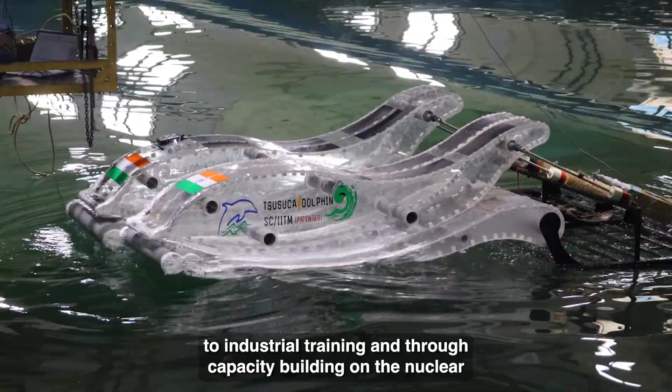This maritime engineering program is very special, with multidisciplinary input from mechanical, civil, structural, aerospace, naval architecture, chemical engineering, electrical, electronics, and applied mechanics. It's dedicated to industrial training and thorough capacity building in the new trade of the maritime sector. It's a growing economy offering job opportunities and research frontiers as India grows. The Blue Corridor initiative planned by the Government of India is an important mission requiring maritime engineering growth, and this program caters to that expected capacity building.

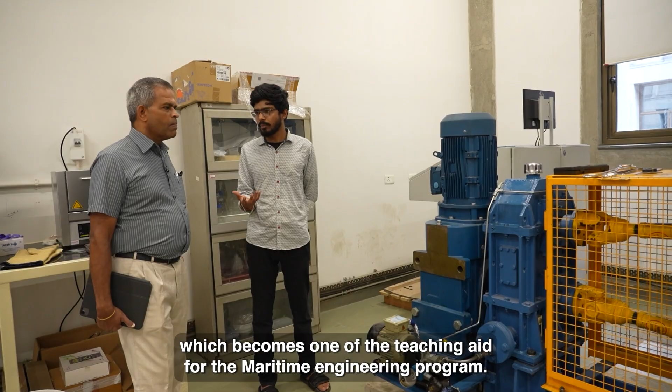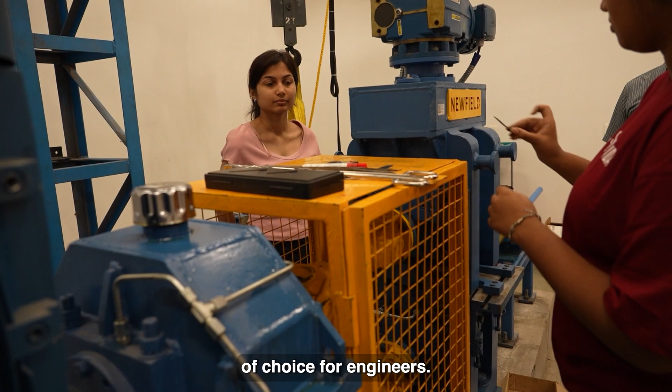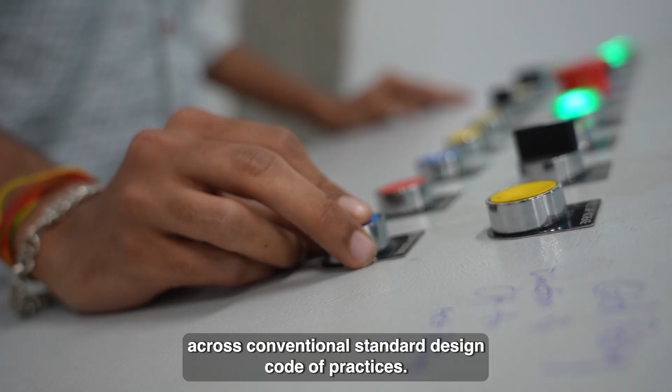This is part of the material science engineering laboratory, a teaching aid for the maritime engineering program. When we talk about materials innovation in the maritime industry, concrete and steel have been conventional choices, but now we have titanium vessels and high-speed craft boats made of fiberglass. These advanced materials do not always fit conventional standard design codes of practice.

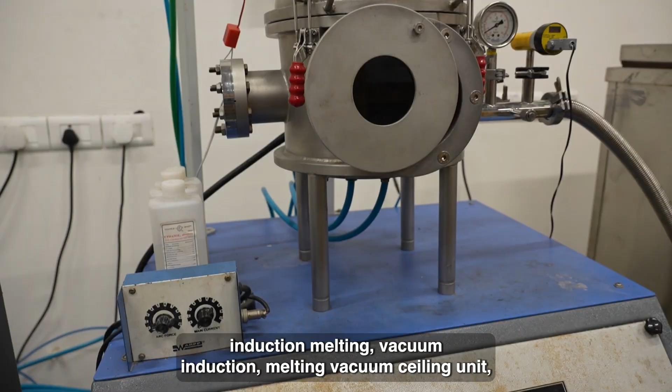We conduct box furnace tests, tube furnace tests, vacuum arc melting, induction melting, vacuum induction melting, and vacuum sealing, all present in this laboratory, which is just a small segment of the material science laboratory.

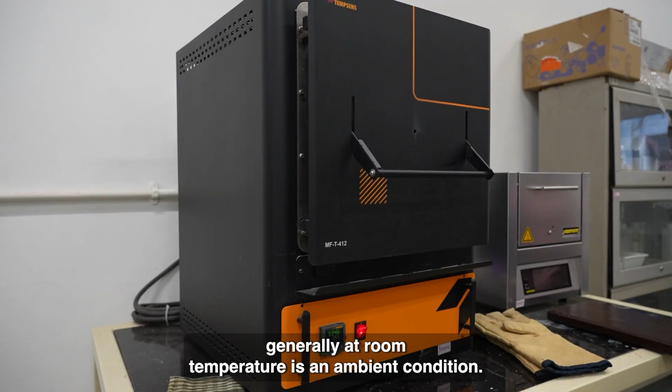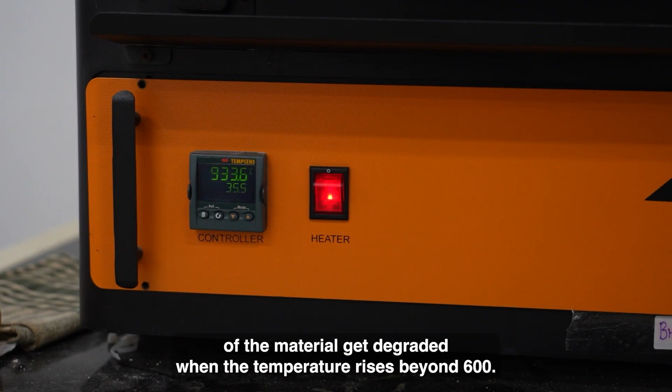In a typical furnace, the operating temperature for testing a specimen can go very high. Generally at room temperature and ambient conditions, mechanical properties do not alter much, but as you'll see in the course lectures, the strength of a material degrades when temperature rises beyond 600 degrees. Therefore, for fire resistant design, you must choose an alloying element such that the strength doesn't degrade beyond 600 degrees Celsius.

Welcome to the ambience of the IIT Madras lecture theatre, one of the interesting classrooms where maritime engineering classes will be conducted. We have state-of-the-art projection facilities and good audio-visual recording systems.

Once the lecture is over, the system generates PDF files of the lecture directly, which can be emailed to your email ID. It's a state-of-the-art facility at IIT Madras where lectures are recorded for life and shared with students immediately. This is the IIT Madras library.

The library has collections of standard textbooks and references for the course and program. It also has online editions of design codes of practice, reference materials, and e-collections of video lectures from international courses and programs related to maritime engineering.

We will be taking you around the advanced material manufacturing units, so you will see the state-of-the-art facilities available at IIT Madras. Welcome to the program to join MTech and PhD at IIT Madras Maritime Engineering. Please try to enjoy and take advantage of this to the maximum. Welcome to the program and welcome to IIT Madras.

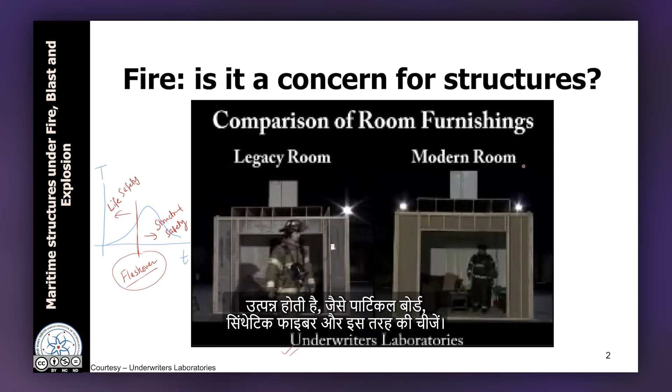With this, let us watch the video. Both rooms have similar energy content in terms of total energy. Ignition is started, and both have similar settings.

As was the case in the previous videos, fire has been initiated at one corner of the room in a waste basket. Initially, the spread of fire will be only through proximity—items which are close to the flame will catch fire first.

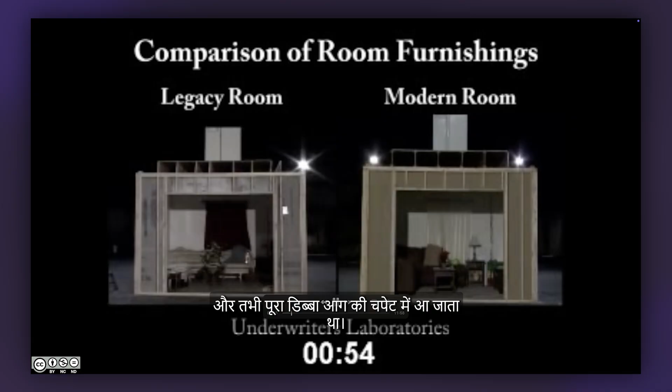Then a hot layer of gas will be formed at the ceiling. This ceiling begins to radiate everywhere, and that is when the entire compartment would catch fire. That event is known as the flashover.

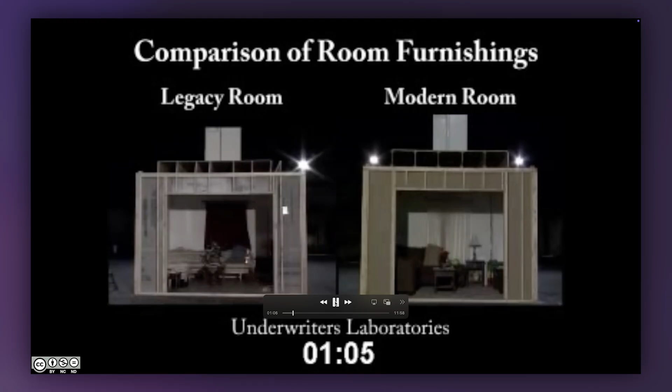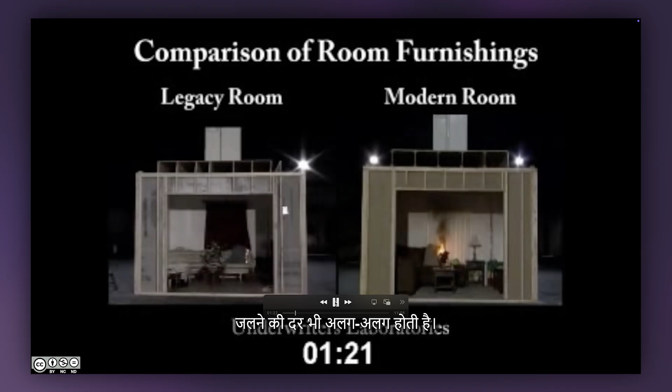What we will notice here is that the room on the right hand side, the modern room, has already begun to give very black smoke. Whereas the room on the left, the legacy room, has a more clean burning, so to say. The rate of burning is also different. The size of the fire in the modern room is increasing quite rapidly now, whereas on the legacy side it is still relatively quite small.

Hot layer of gas and smoke is already very visible in the modern room within just 1.5 minutes, which means that hot layer has already formed and has already begun radiating to the rest of the room. Whereas on the legacy side, the layer of hot gas is still very small—in fact, it is not even visible as leaving the compartment.

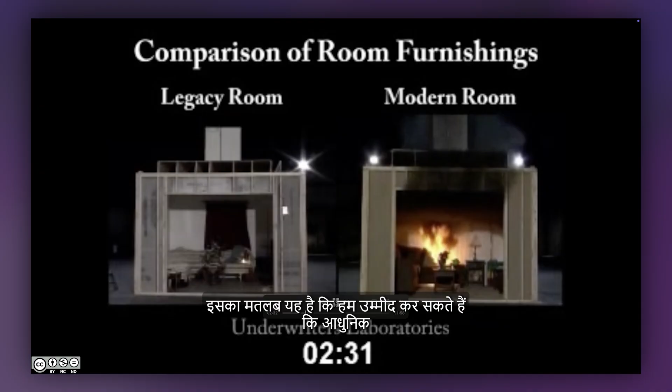In the modern room, you will see that the smoke layer is descending, which means the neutral plane is coming down, implying that the reservoir of hot gas has increased in size and temperature, indicating a much higher radiation heat flux being emitted and received by the surfaces around. This means we would expect flashover to happen quite fast in the modern room—in fact, much earlier than in the legacy room, based on what we are seeing as of now.

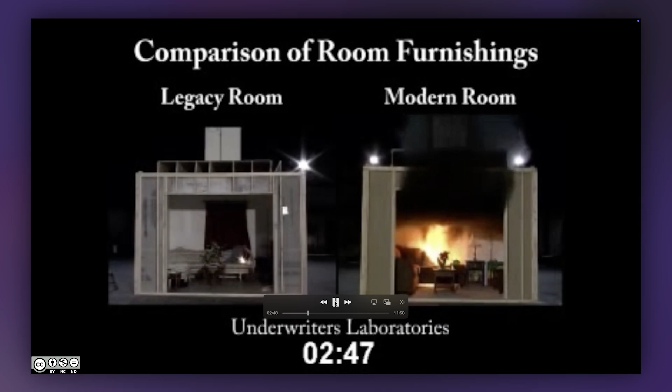It is reaching almost 3 minutes. The size of the fire in the modern room has become quite large, but it has still not flashed over yet. Whereas in the legacy room, the size of the fire is still very small.

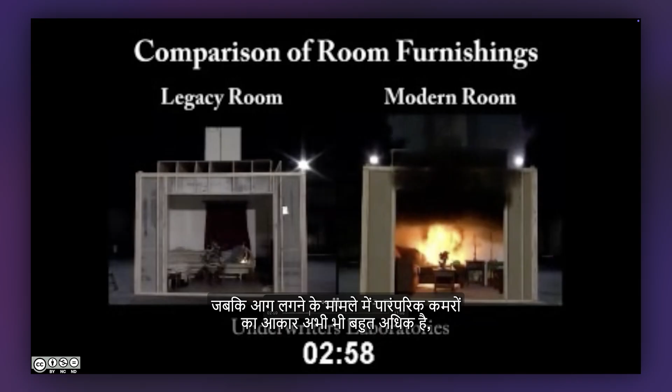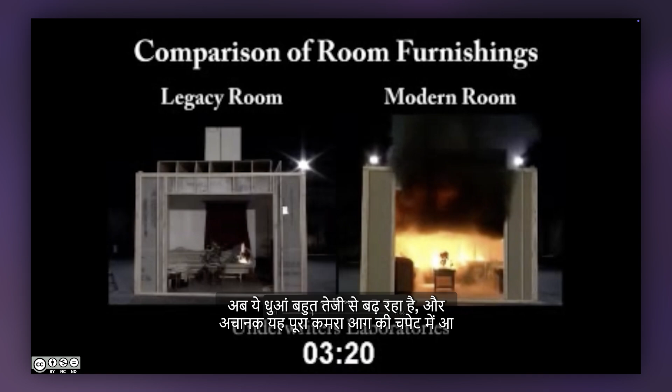Now you may notice that items which are away from the fire have begun to emit some fumes in response to the heat radiation being received from the top layer. Now these fumes are increasing very rapidly, and suddenly this entire room will catch fire.

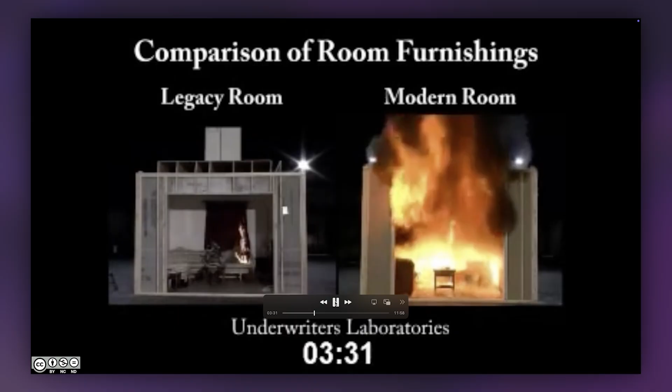Now this entire room is on fire, which means flashover has happened in the modern room in about 3.5 to 4 minutes—in fact, a bit less than that, around 3.5 minutes.

The size of the fire on the legacy side is still increasing. It is still not large enough to have a large layer of smoke, which will eventually cause flashover, whereas the room on the right hand side is completely gone.

This is the situation for which we have to design structural members—after flashover, this is the intensity that the structural members are exposed to. That is where the standard fire curve considers time-temperature in the post-flashover scenario. And this kind of scene is what develops.

The time to flashover in the modern room is about 3 minutes 40 seconds, whereas the time to flashover for the legacy room is about 29 minutes 25 seconds. So if we take it as 3 minutes for the modern room and 30 minutes for the legacy room, we see that flashover in the modern dwellings we stay in is happening in as much as one-tenth of the time it used to happen earlier.

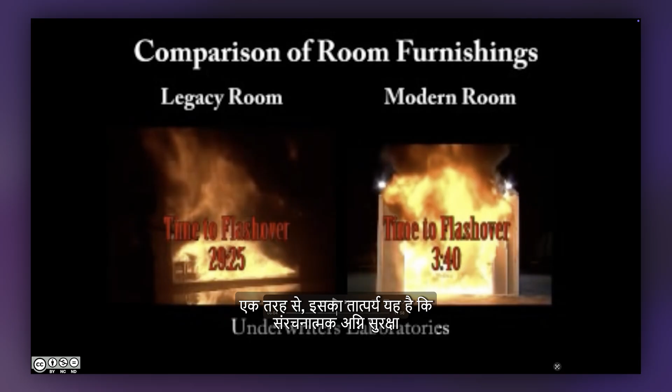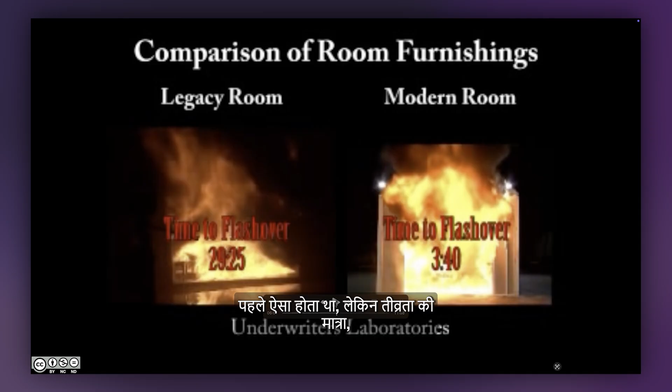In a way, this implies that structural fire safety has become much more important now than it was earlier. Not that it was not important earlier, but the amount of intensity and the amount of time we have is changing quite a bit.

If we compare these timelines, it is shown in this graph here. The shortest time to flashover is what we saw visually—in the modern system, the shortest time to flashover is around 3 to 3.5 minutes. The legacy timeline is around 30 minutes, much more. And the pre-flashover period is the time when all the life safety operations have to happen.

From a structural point of view, what we are interested in is this blue and yellow. So once we have designed systems, we would want to know in how much time a structure will collapse given a fire. What we see is that due to the intensity and severity of the fire, structural systems can collapse much earlier in a modern fire compared to a legacy fire. Knowing this helps us design structural members so we can achieve the necessary fire protection.

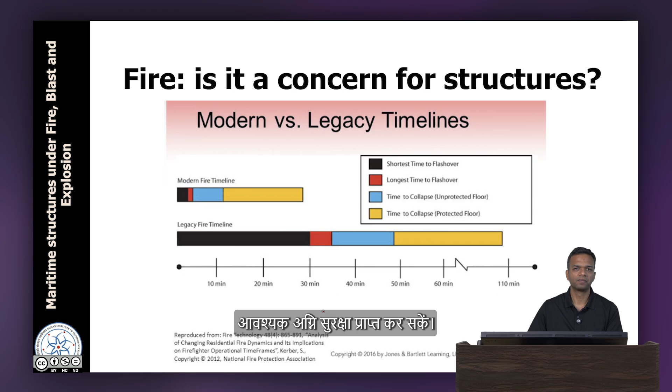Let us move on to discuss effects of fire on structures. Before we get into detailed temperature calculations, let us look at the main effects of fire on structures. First and foremost is thermal expansion.

Here we consider a case of uniform heating, say there is an unrestrained cantilever beam. We increase the temperature of this entire beam uniformly by delta T, the increase in temperature. Due to this, the length increases by L alpha delta T, where L is the original length. This is the change in length, delta L equal to L alpha delta T, where alpha is the coefficient of thermal expansion, or CTE. This is known for most materials of practical significance.

Now in this case, since thermal expansion has been allowed, there will be no additional stress due to the change in temperature. However, if we take the same beam and restrain it on both sides, and again subject it to a uniform increase in temperature of delta T, this L alpha delta T expansion, which would have happened if there was no restraint, is now not allowed. Hence, in this case, it will lead to thermally induced stress.

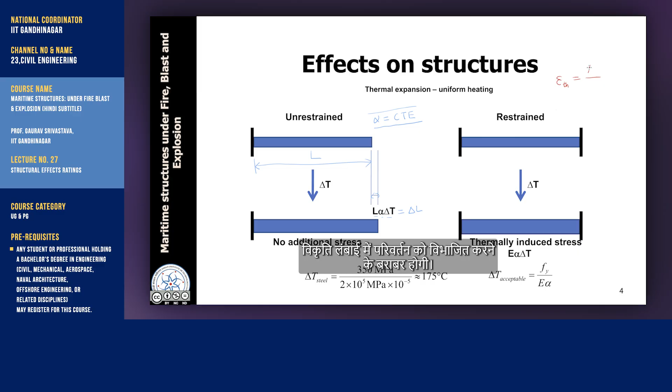We know that the thermally induced strain will simply be the change in length divided by L. The change in length is L alpha delta T divided by L, so this is alpha delta T, the thermal strain. The stress for a linear elastic material will be Young's modulus E multiplied by strain. Hence the thermally induced stress in the restrained case becomes E times alpha delta T. That is the additional stress we get purely due to thermal effects.

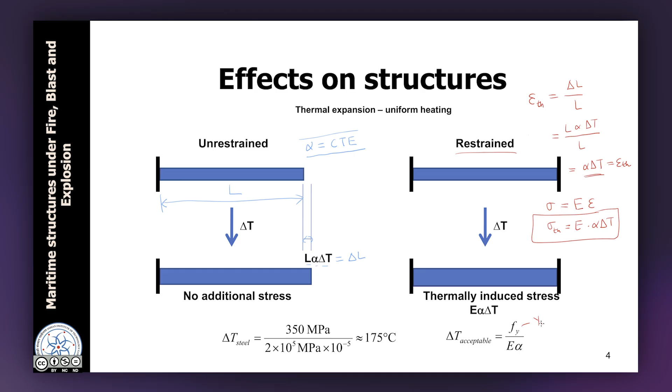Now suppose there were no other considerations and the allowable compressive stress in this beam is 350 megapascals. From there we can calculate how much change in temperature is allowable before this beam will fail. So delta T acceptable will be Fy, the yield stress of the material, in this case steel, divided by E times alpha. That gives us the acceptable change in temperature before this system will fail, and this is all happening because we have a restrained system.

Now this restraint will give rise to one more effect, thermally induced buckling. From basic mechanics, recall that for a column subjected to an axial load P with length L, the critical buckling load PCR can be derived using the Euler buckling theory, which comes out to be pi squared EI divided by LE squared, where LE is the effective length depending on the end conditions. Now what we know is that this E is a function of temperature.

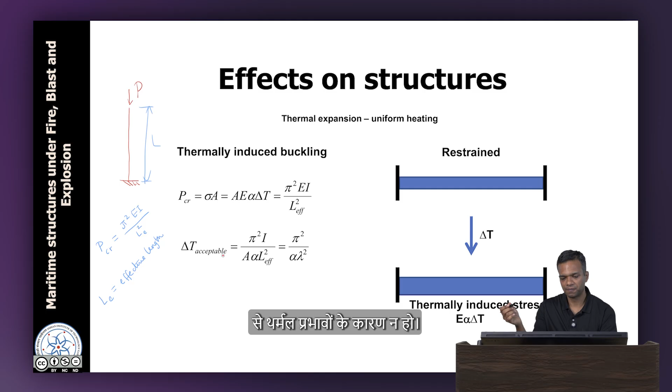So again, E is a function of temperature, and we will see how. But then the critical buckling load is now sigma times A, where A is the area of cross section, and sigma we know is E alpha delta T. From here we can again calculate T acceptable such that buckling does not happen purely from thermal effects. In the previous slide we saw that yielding should not happen because of thermal effects; in this slide we are saying how buckling can be onset based on thermal effects, where lambda is the slenderness ratio.

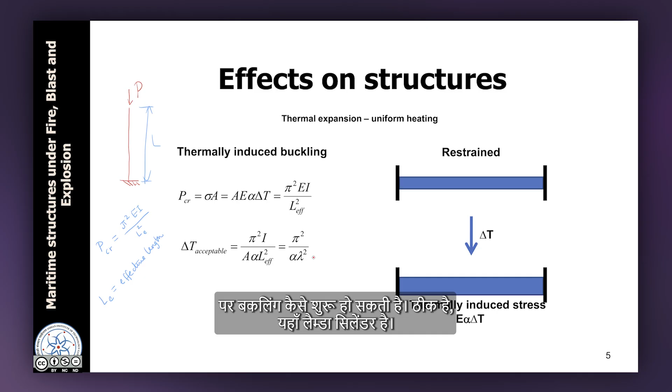The previous two cases were of uniform heating, meaning the temperature of the entire cross section and length would be the same. That situation is possible for metals like steel, which are good conductors of heat. However, for materials like concrete, which are poor conductors of heat, if we expose them on one side, the temperature at the bottom face and the top face can be very different. In fact, for a reinforced concrete cross section, if the bottom boundary is heated with temperature T1, the overall temperature distribution can be highly nonlinear, where this is T1 and this may still be T ambient.

However, for an idealized case, if we consider a linear thermal gradient, which means along the cross section, the thermal gradient looks like this, where this is say T1, this is T2, and this is linear.

In such a case, when temperature at one end is more and the other face is less, then because one of the fibers will expand more and the other fiber will expand less, it will lead to thermally induced curvature. An expression under linear theory can be obtained for thermally induced curvature like so.

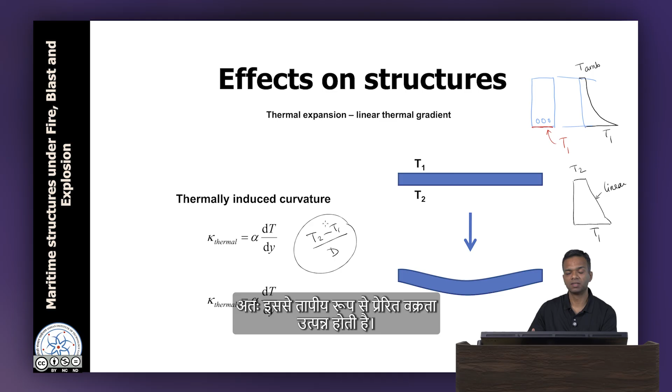So the effects we have seen so far are the thermal response of the deformation. However, due to temperature, the material properties of the system will also change.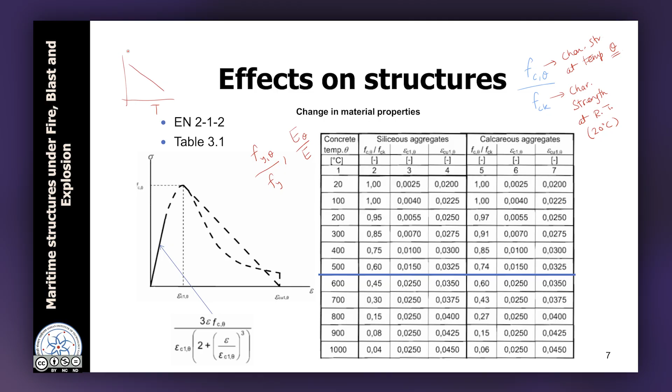So if we put all of this together, what is happening is that without fire, there is a certain demand in load - so this is the demand - and there is a certain threshold, which is the capacity. So there is capacity, and there is demand, and the distance between these two is the margin of safety.

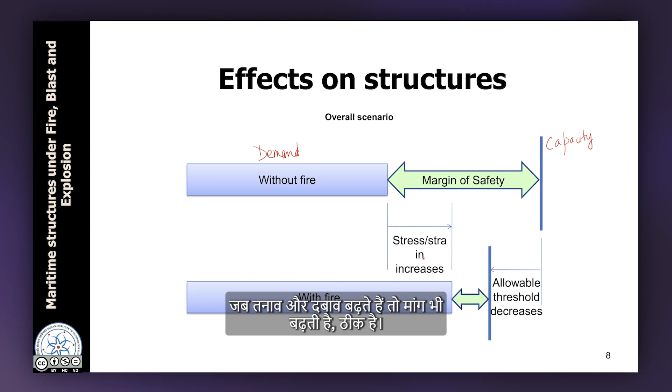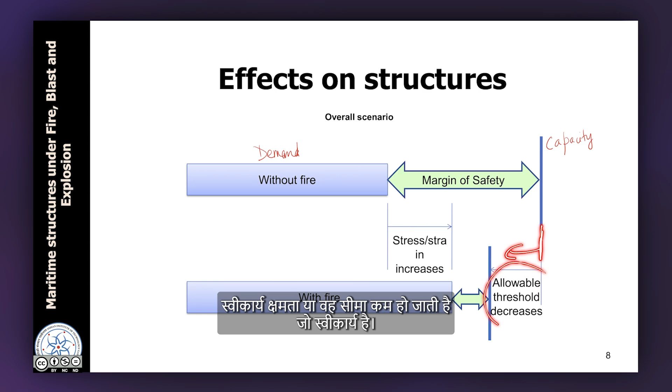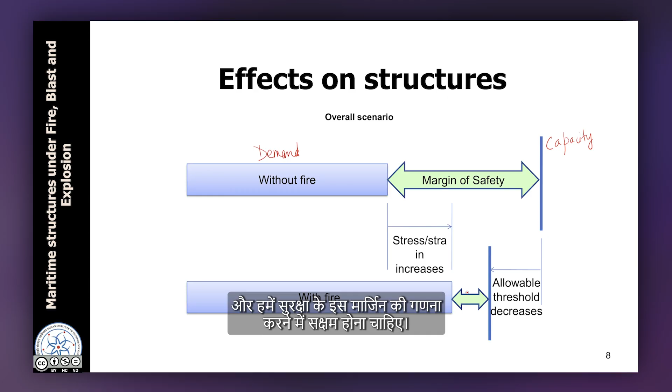Due to fire, the stresses are increasing. When the stresses and strains increase, demand increases. However, because the material properties degrade, this allowable capacity, or threshold, reduces. So this in a way reduces the overall margin of safety, and this margin of safety is what we need to be able to calculate so that we are able to design structures under fire.

These are some photographs which show the effects of fire on structures. The top two photographs are of steel structures. What is very visible is that there are very large deformations, extremely large deformations. This is because the strength has reduced and thermally induced buckling may have happened, thermally induced additional bending may have happened. There is instability, which means this is a case of buckling - buckling which was not happening at room temperature has happened at high temperature.

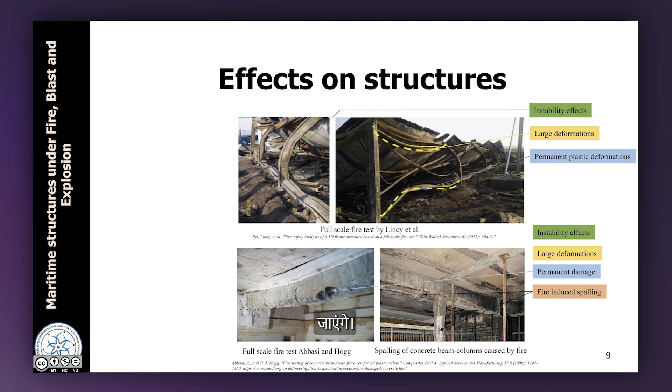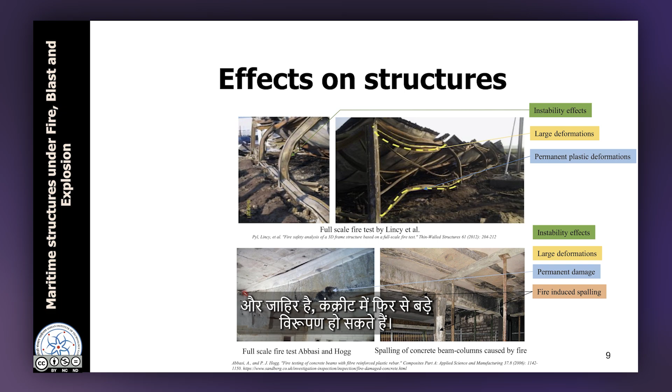And when deformations become very large, these steel type materials undergo permanent deformations, or sometimes called permanent plastic deformations. For concrete, there are again instability effects that can happen, and there is an additional phenomenon called fire induced spalling. Spalling implies that chunks of concrete would chip off out of a beam or column. This corresponds to permanent damage, which means damage that cannot be undone, and obviously large deformations can again happen in concrete.

So if we have a structural system, what we are looking at is we have a fire. From this fire, there is a heat transfer to the structural system. Then within the structural system, there is a heat transfer. This is what we need to be able to calculate. So temperature of fire to temperature of structure is what we need.

For steel structures, this is sufficient. For concrete structures, there are additional complications or additional physics that one has to resolve. As we know, concrete is a multi-phase system: you have aggregates, cement matrix, moisture which is in liquid form, and air. This is at room temperature.

At a higher temperature, some of this moisture converts to water vapor. And we know that when liquid water gets converted to water vapor, its volume increases rapidly. This causes a lot of increase in pressure internally. This is the increase in pore water pressure of a concrete structure at a higher temperature.

And that can cause additional spalling. We will see an example where it can cause explosive spalling, which means the column can actually explode under a fire, even though there was no other explosive provided to it.

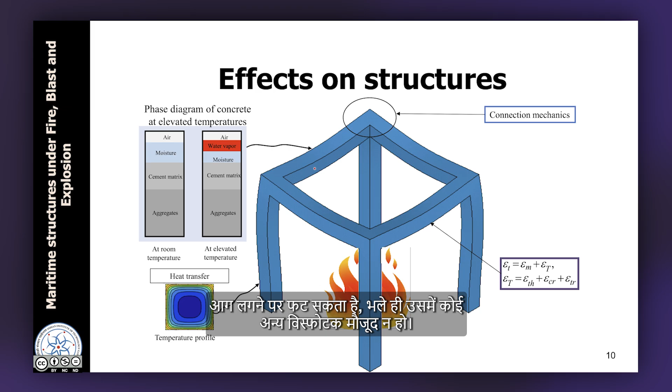Then there may be boundaries of a structure which are not exposed to fire. They are exposed to a different temperature, say room temperature. That is where convection and radiation cooling may happen. Inside the structural member, which is generally a solid, the heat transfer happens through conduction.

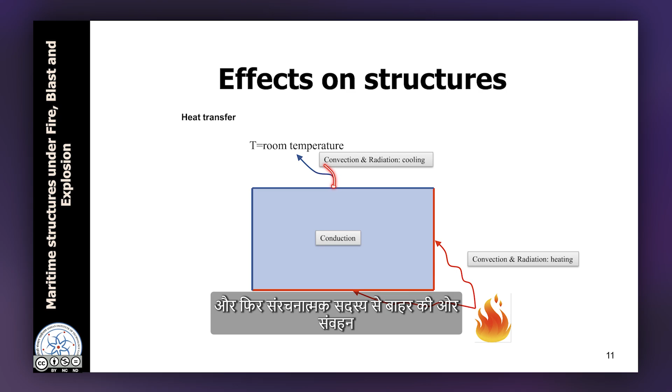So there are three modes of heat transfer at play here: convection and radiation from fire to the structural member. Inside the structural member, we have conduction, and then from the structural member to outside, that is convective cooling or radiative cooling.

As we said, for concrete structures, there is an additional water vapor transport that one has to look at. Mathematically it can be modeled as a diffusion equation. So there is diffusive mass transfer, but when chunks of concrete begin to spall, the boundary conditions become updated. Basically, initially this is the heated perimeter of concrete.

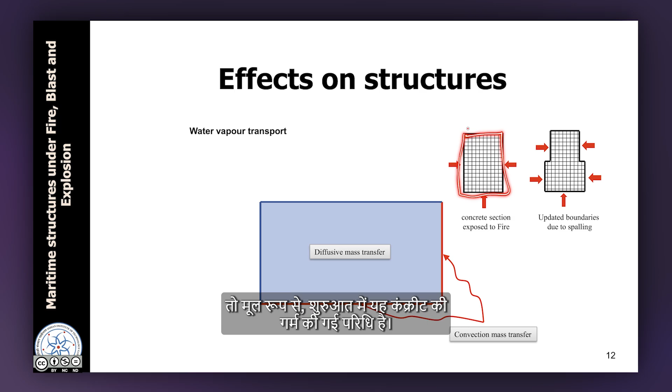After this part has spalled off, the heated perimeter increases. So this further intensifies the temperature seen by concrete members.

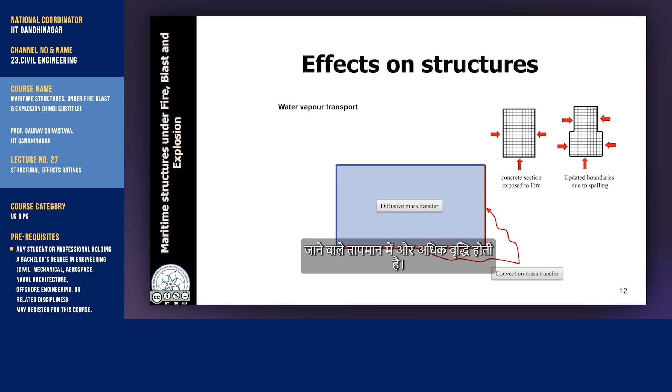This is an example of an experiment of a slab where, based on the heating, we can see that there is a dry zone and there is a saturated zone. When water vaporizes, it will try to expand. When it tries to expand and leave, that is where it introduces tensile stresses in concrete, and we know that concrete is not very good in tension, so it begins to crack from there. And if we are able to break it inside, we will still see liquid water available. So this is the water front which is available.

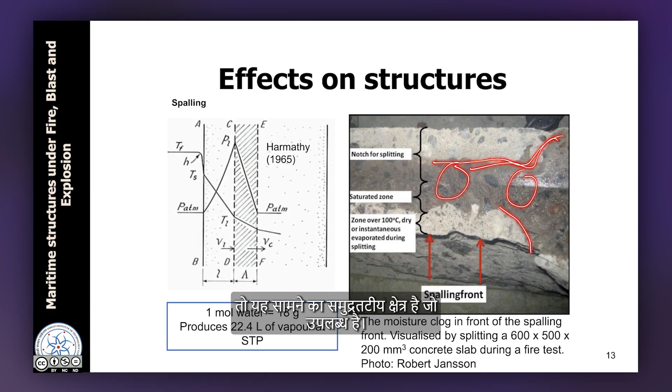This photograph shows two types of columns. On the left hand side is normal strength concrete, which is lower strength, say up to 40 or 45 megapascals characteristic strength. On the right hand side is high strength concrete, which is very high strength, meaning strength greater than 50, say 50 megapascals.

What is interesting to observe here is that normal strength concrete has a higher permeability, which means there will be a higher chance of an interconnected pore network being available. So the water vapor which is trying to expand and go out is able to escape. When it is able to escape, the extent of spalling is not that severe.

When we come to high strength concrete columns, their porosity is very low, permeability is very low. So the water vapor is not able to escape. Hence, it builds a lot of tensile stresses inside the concrete, and when enough of such pressure has been formed, the concrete column can actually explode. This has been observed experimentally, as well as in several real life fires.

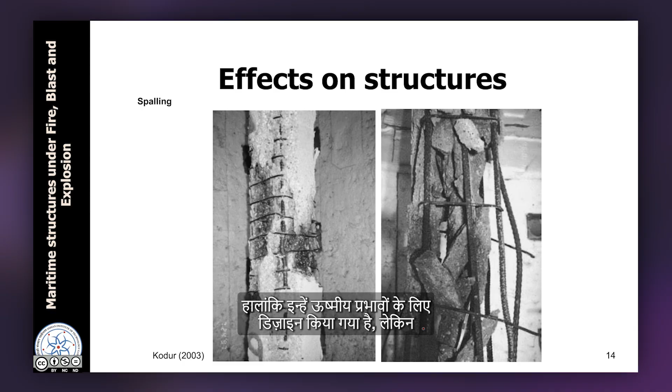Now, an exploding column can be very dangerous for life safety as well as for building safety. For building safety, it is obvious, because this column completely ceases to take load. But from a life safety point of view, many times firefighters are inside the building when the fire has become a full size fire. In such a case, if a concrete column would explode, that can put our firefighters at risk, because the proximity suits, although designed for thermal exposure, are not designed for projectile impact.

From here, let's discuss what are the design requirements and limit states. So primarily there are three limit states that one will discuss.

One is the load carrying capacity. It is the total time in which the column, beam, or slab would fail, basically when the load resistance becomes less than the load effect. As long as it remains more than that, it is okay.

Then the second one is integrity. Integrity accounts for small deflections, but predominantly it is meant for cracks. If small fissures or cracks develop which allow hot gases to pass through to the other side, that is considered loss of integrity.

And the third one is loss of insulation, or the insulation requirement. This is when integrity is still retained, but purely due to thermal conduction from one side of the member to the other, the temperature increases so much that on the other side of the wall or slab, the room can become exposed to a high enough temperature that it can onset another fire.

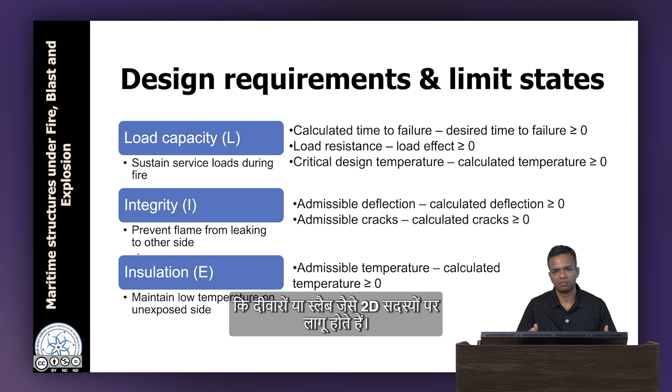So these are the three fire ratings that one talks about. The first one, load carrying capacity, is applicable to all structural members: beams, columns, slabs, shear walls. Integrity and insulation are applicable primarily to partition members, such as 2D members like walls or slabs.

If we again recall the standard fire curve for a moment, we recall that the standard fire curve represents a post-flashover temperature scenario.

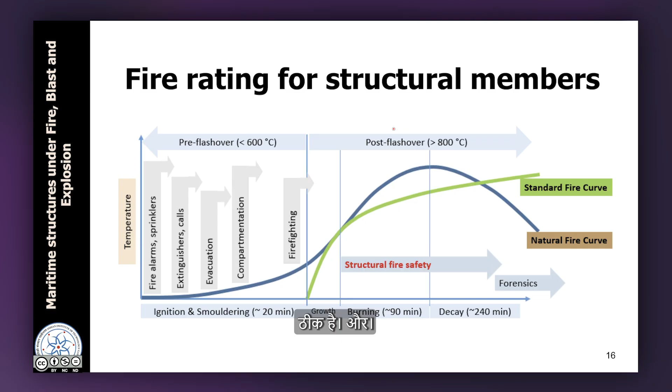Now let us define what is fire rating. We have been talking about it, that fire rating is always derived from a standard curve. Let us say if we have a fire rating of 1 hour, fire ratings are defined in terms of time.

When we say fire rating is 1 hour, what that means is we take a structural member, put it under the loading condition as it would be in a normal service condition, and expose it to the standard fire curve shown here. So if for up to 1 hour the structural member is able to sustain its L, E and I requirements—load carrying capacity, insulation, and integrity requirements—then it will be said that it has a 1 hour rating.

Similarly, we can say what is a fire rating of 2 hours—that is applicable if it can sustain all of its requirements up to 2 hours, and so on. So this is how we define fire ratings in terms of time, and these are all derived from the standard curve.

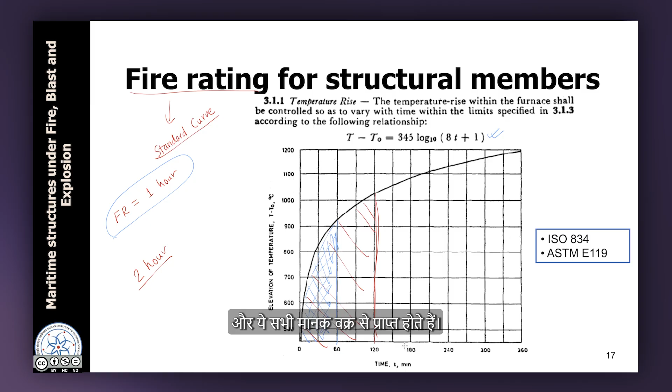One of the questions that may arise is that we are defining fire rating based on this standard curve, whereas actually the structure is subjected to this natural fire curve. Even for structural members where we are looking at the post-flashover scenario, one of the key differences is that the standard fire curve always increases, so temperature does not decay, whereas in a natural curve there will be a decay in temperature.

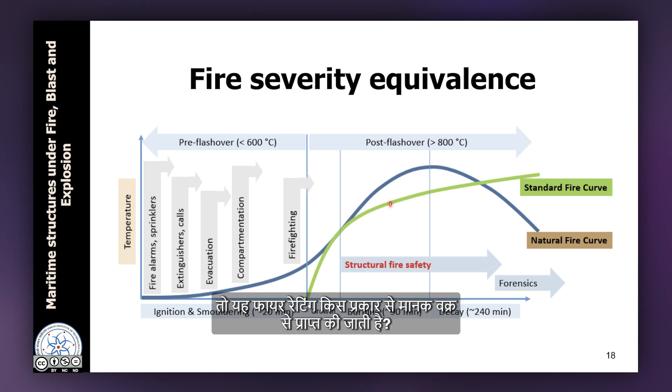So how is this fire rating, which is derived from a standard curve—that is, a time—how is it applicable in a real scenario? That is what leads us to the concept of equivalent fire severity.

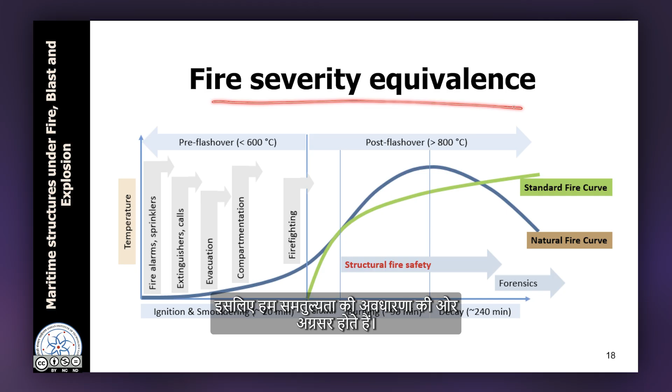We go up to a time where the area under the standard curve is equal to the area of the real curve. This is an area equivalence. It is most easy to implement. However, it does not have a physical basis behind it because area of a time-temperature curve does not have any physical significance. Area of HRR versus time curve gives us energy, but area of temperature versus time does not give us anything physically meaningful. So while this can be used, it is not ideal to be used.

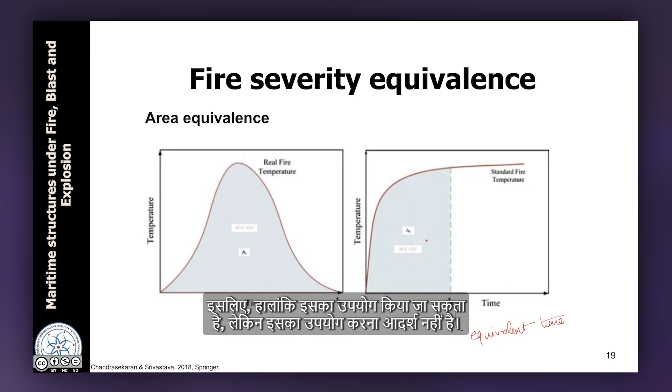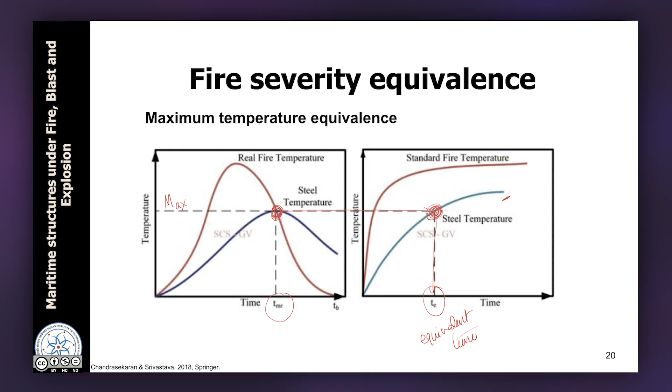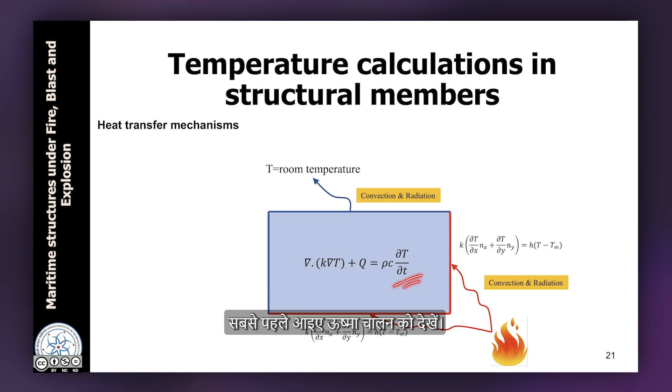This slide shows the derivation of the one dimensional transient heat equation. I will not read out the steps, but it is simply doing an energy balance. Here we have introduced two more properties: C, the specific heat of the material, and rho, the density of the material. In cases when conductivity, specific heat, and density are constant for a material, one can define the ratio alpha equal to K by C times rho, which is the thermal diffusivity.

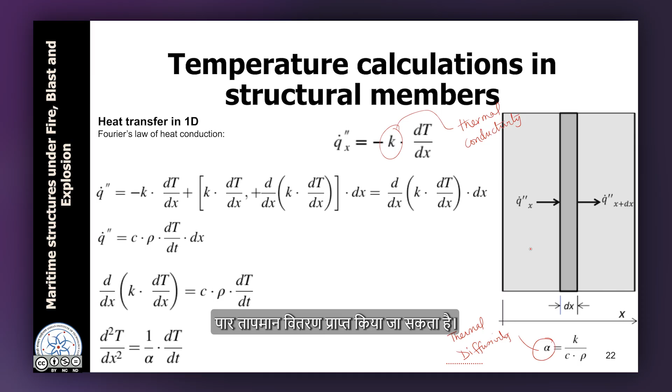This thermal diffusivity is an important material parameter when doing 1D heat transfer calculations. This is the final transient equation that one can solve to obtain temperature distribution. What is interesting is that this equation enables simple calculations also. This derivative we can approximate as K times delta T divided by delta X, since dT by dx is the derivative as delta x tends to 0. But under many situations we can simply do this, where delta x is the total length between two points. So this conductive heat flux, q double dash, can simply be written as K times delta T by L. Here we define a term Rk, called thermal resistance, which is the ratio of the length in which heat transfer is happening divided by K, the thermal conductivity.

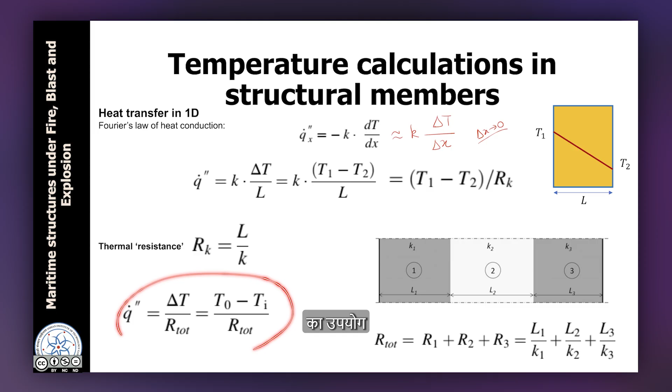This thermal resistance acts in a very similar way to electrical resistance. So if we have multiple materials, one of length L1 and conductivity K1, another of length L2 and conductivity K2, etc., we can define thermal resistance for each of them, R1, R2, R3, and this is like resistors connected in series. So the total R will simply be R1 plus R2 plus R3. From here, if we know the temperature at one end, it is easy to calculate temperature at the other end or anywhere in between using the regular electrical resistance methodology. Like this we can handle multiple connected materials, calculate total resistance, and then calculate Ti, any intermediate temperature, like this.

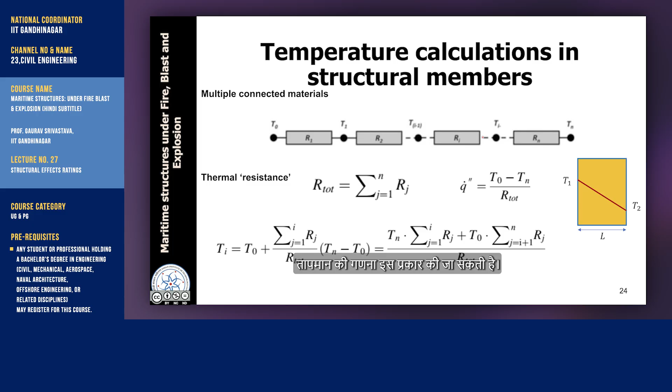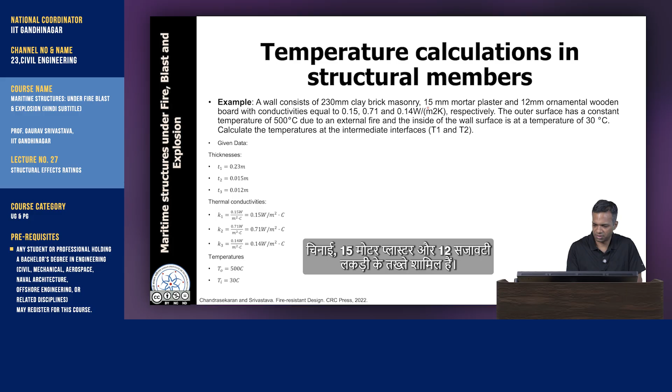To do an example: a wall consists of 230 mm clay brick masonry, 15 mm mortar plaster, and 12 mm ornamental wooden board. Their thermal conductivities are also given. The outer surface has a constant given temperature, and the inner wall temperature is given. So we have to calculate temperature at the intermediate interfaces. That is what we have to calculate.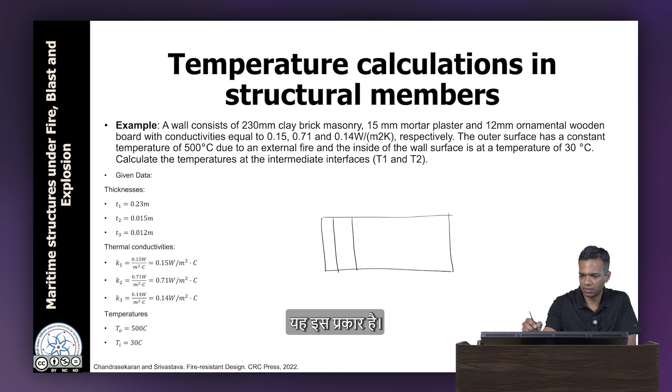So if we draw this, it is like this. So we have here masonry 230 mm, this is plaster 15 mm, and this is wood, okay, and wood is 12 mm.

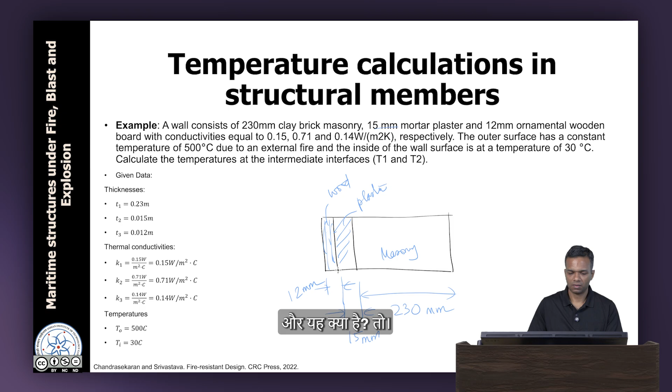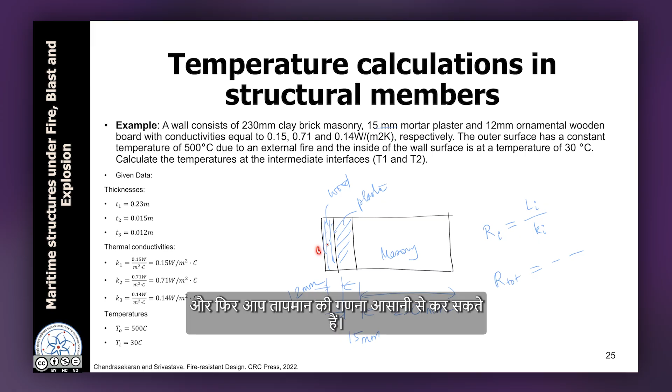So looking at this kind of analogy, we know L and K for each. So Ri, which is resistance of ith member, can be calculated, and then you can calculate the R total as the summation, and then you can do the calculation of temperatures. Okay, so please try to do that by yourself.

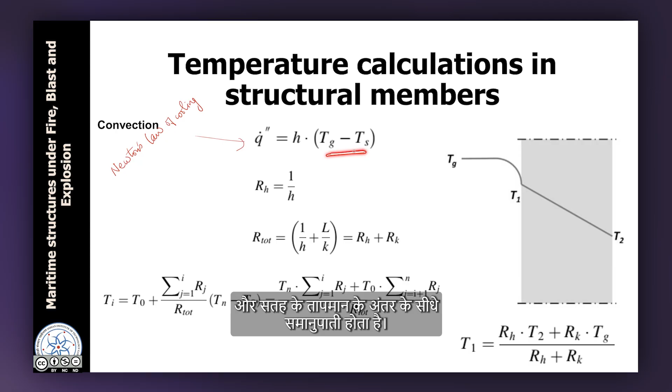Next we look at convection. Okay, so convection is generally governed by Newton's law of cooling, which states that the convective flux is directly proportional to the difference in the gas temperature and the surface temperature, and in this case the proportionality constant is H, which is also called the convective heat transfer coefficient. Okay, so this is also a property of fluid which can be calculated for different scenarios.

And if we continue the electrical resistance analogy, just like earlier we defined L by K as the resistance, the convective resistance can be defined as RH, which is 1 by H. Okay, so if we have a system where conduction is happening here and convection is happening due to the gas outside, the total resistance can be simply calculated as 1 by H plus L by K. Okay, and again we can then calculate the intermediate temperatures, say T1.

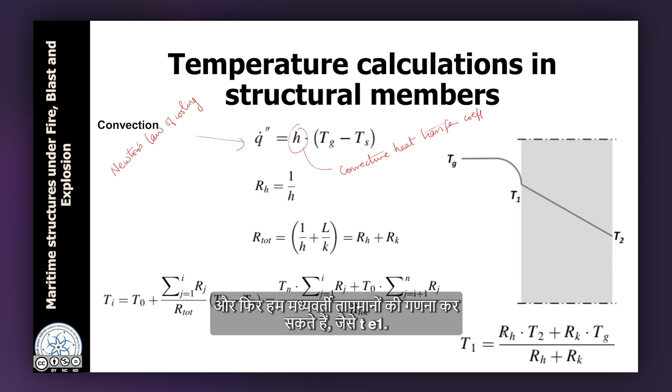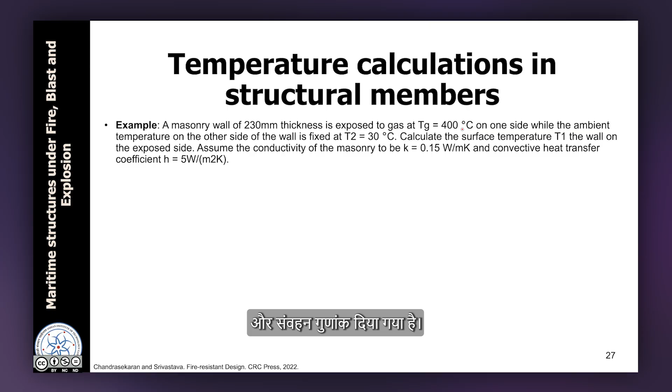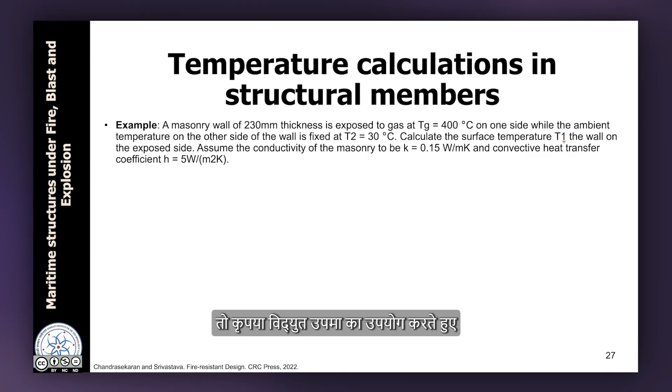This is an example, again you can try to do yourself. There is a masonry wall of 230 mm thickness which is exposed to a gas temperature of 400 degrees, alright, and the convective coefficient is given, thermal conductivity is given. We need to find surface temperature of the wall. Okay, so again using the electrical analogy, please try to solve this problem.

The third mode of heat transfer is radiation, which happens to be the fastest because it is governed by the Stefan's law, which says that the heat flux is directly proportional to the fourth power of the temperature, and this temperature is always written in absolute terms, which is in Kelvin. In conduction and convection problems, we can use temperatures in degree Celsius or degree Fahrenheit depending on what we require.

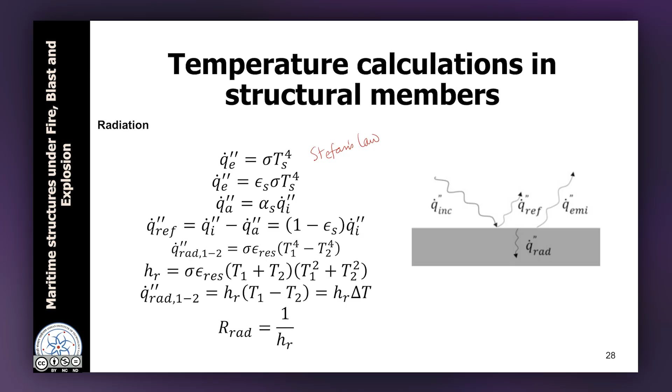There are some additional physics involved in radiation. One is that it always follows Huygens principle, which means it travels like an electromagnetic wave. So if we travel by a distance r, okay, the intensity drops by r squared. Okay, so this is the inverse square law. Then also there is an effect of the angle. Okay, so if someone is straight on versus at an angle, then that is governed by the Lambert cosine law, and these angles give rise to view factors.

So if two surfaces which are emitting to each other, they are in front of each other, their view factor, typically denoted as phi, is 1. Otherwise the view factor is different, okay, and this view factor can be calculated. So this is the expression for calculating view factors. However, many books provide view factors for different configurations, okay, which can be directly used instead of carrying out this integral. So for predefined scenarios, these integrations have been calculated, and these are available as tables which can be seen.

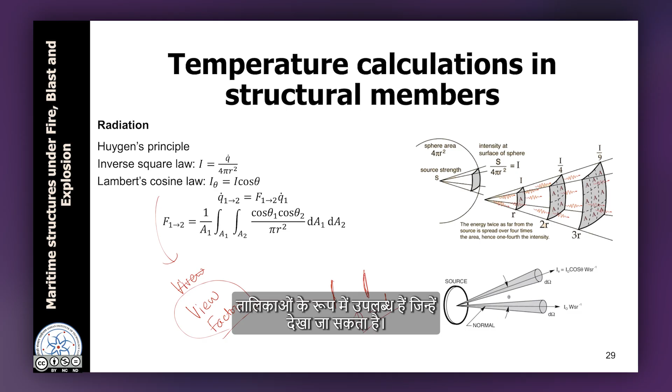So again, there is an example. This one I have given a solved example because the calculation of view factors for certain cases is non-trivial.

Okay, so we have an uninsulated fire door made of steel, which is uniformly heated to a temperature of 650 during a fire. We calculate the maximum incident radiation parallel to the surface 0.5 meter from the door leaf, which is where these are the dimensions. Emissivity is given as 0.9.

Emissivity is again a material parameter. Emissivity equal to 1 corresponds to a black body. Black body radiation is a perfect radiation where everything, all the energy is radiated. For all real materials, emissivity is always less than 1, which are also sometimes called grey bodies. In this case, emissivity is 0.9.

So we have this as the given data, and this is the calculation of view factor, and then finally we are able to calculate the maximum incident radiation. This incident radiation of 1.4 megawatt per square meter is quite large. Just as a reference, the solar radiation that we receive on earth, or that we feel, ranges between 1 to 1.5 kilowatt per square meter. So this is 1000 times that, a fairly large incident radiation.

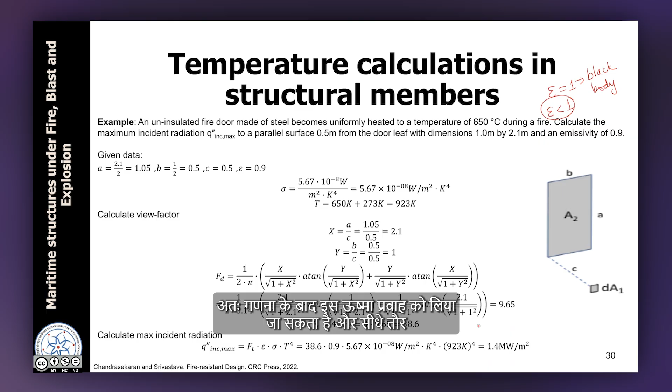In certain cases it may be computationally not very easy to do. Then the second best option is to give a Neumann boundary condition, or a flux boundary condition. So just like in the previous example, we calculated the heat flux which is incident. This heat flux, after calculation, can be taken and directly applied as a boundary condition on the wall, on the surface of the wall. So this is the second possibility.

The third possibility is to directly give the surface temperature on the structure. From a calculation point of view, this is the easiest. However, from a realistic point of view, this is not ideal, because generally temperature is not given directly on the wall surface or on a structural member surface. What we know is gas temperature. So from this perspective, the most ideal boundary condition is the mixed boundary condition, where we know the gas temperature and surface temperatures are calculated. Second best option is the flux condition, where we first calculate the flux and then give it as an input. Third possibility is a Dirichlet, or temperature, condition where temperature of the surface is directly specified.

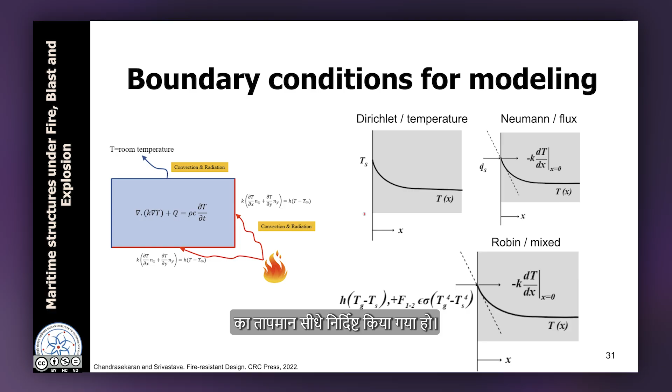So to summarize what we have seen today in this lecture: is fire a concern for structural systems? It is, from the following perspectives - structural safety becomes important post flashover, and in most modern dwellings the time to flashover has been reducing. Second, what are the effects of fire on structures? One is thermal expansion and curvature - deformations originating from change in temperature. Second is degradation of material properties. These two things combined reduce the margin of safety, as we saw.

Then we looked at the structural fire ratings. Fire ratings are of three kinds: one is strength related fire rating, R; one is integrity; one is insulation. For structural members, all three apply. Integrity and insulation are primarily applicable for 2D members, whereas structural ratings are applicable for any load bearing member, whether it is 2D or 1D - meaning whether it is a wall or a slab, which is 2D, or a beam or column, which is 1D.

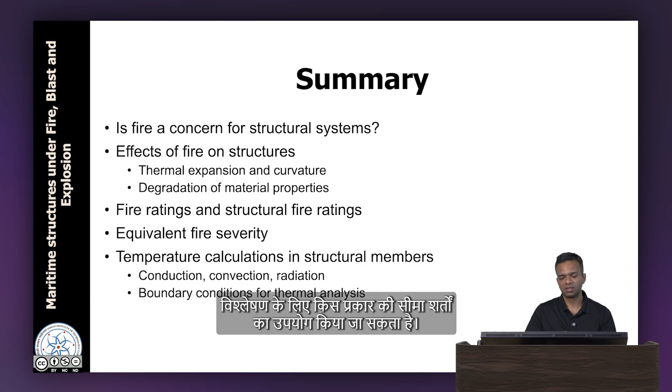We looked at an equivalent fire severity concept, which links fire ratings derived from the standard fire curve to a real fire exposure. There were a couple of things we saw: one was area equivalence and one is temperature equivalence. Then we saw how temperature calculations can be done in structural members - simple ways to calculate conduction, convection and radiation - and we also saw that if one has to do a more complicated analysis, what kind of boundary conditions can be used for thermal analysis. So this is all for this lecture.